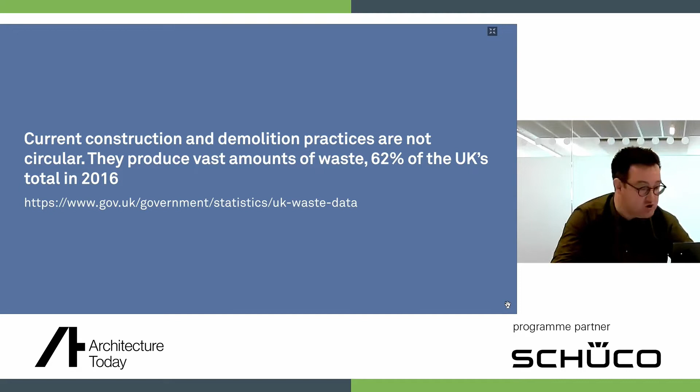We also believe that reworking buildings is critical in tackling the climate emergency. 62% of the UK's waste comes from construction and demolition, and that's something as a profession we feel that we need to change. Today I'm going to take you on a whistle-stop tour of the Standard Hotel and 160 Old Street to share why and how we made good these two buildings. They're both buildings from a similar era, both completed originally in the 1970s. And we've taken two very different approaches to these buildings, but hopefully it'll help you understand how and why we did what we did.

Firstly, the Standard Hotel. We undertook this for one of our clients, Crosstree Real Estate Partners. They won the bid to purchase the hotel from Camden. It was a very interesting purchase process where everyone else was keeping the building as an office space. It had once been the annex to Camden's own council offices, and we were the only people that thought the limitations of the building actually best reflected a hotel use, and we were able to drive value through the building and give it a new life by reimagining it as a hotel.

And we were very lucky to bring on board a series of great collaborators. The interior designer Shawn Hausman will touch on later, and they collaborated with interior architect Archer Humphryes. And obviously to have a great operator like the Standard, who had high ambitions with Crosstree to make the building an amazing exemplar for reuse.

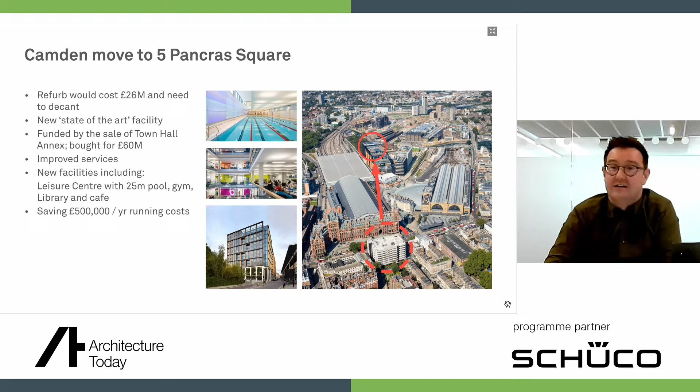This was all made possible by Camden relocating their offices to a new purpose-built facility in King's Cross. This essentially funded the build, which cost 26 million, and they sold the annex for 60 million. It saved them £500,000 a year in running costs, and gave them a new state-of-the-art facility.

The annex itself was an annex to the 1930s Neo-Palladian Camden Town Hall immediately adjacent to the building. It was completed in the late 1970s and designed by Camden Council's in-house architecture team. It bore a striking resemblance to Seifert's International Press Centre in Shoe Lane, completed earlier in the 70s, and was described by Building Design as self-effacing civic pride and order articulated by trendy 1960s quadrant cornered bays.

So it received a really positive press throughout the years, but it had fallen into a bit of disrepair over time, and it was seen as a negative contributor to the local area. It sits at a really interesting junction between the Bloomsbury Conservation Area immediately to the south of the building, and it's actually within the King's Cross Conservation Area.

So we had to do a lot of work convincing Camden prior to the purchase to keep the building - most people wanted to demolish it. We had to convince the Design South East Review panel as well. In order to do so, we engaged with the 20th Century Society to get their support, and did a lot of research into the existing building and its original design intention.

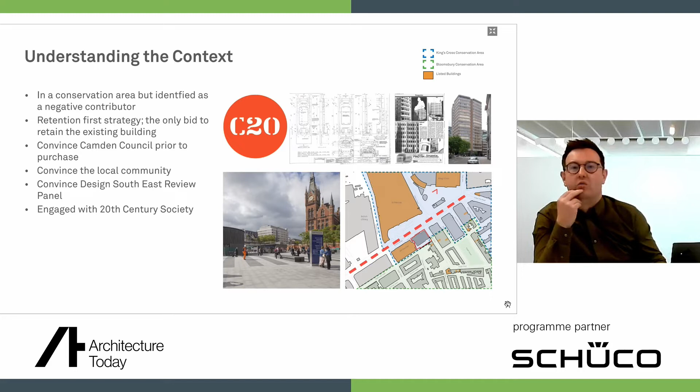This was best described by Edwin Heathcote, the Financial Times architectural critic, who described the building as a subtly compelling piece of architecture which appears more sophisticated the longer you look at it. He interestingly said it was a building as an urban backdrop, but it has the potential to become foreground. We thought that was a really interesting starting point for us: how do we meet the client's aspirations and the building's latent potential, and bring it to the foreground?

So we looked at how we would break down the existing building and start to bring it to the foreground by working with the building's existing facades, fenestration, and massing qualities to extend the building.

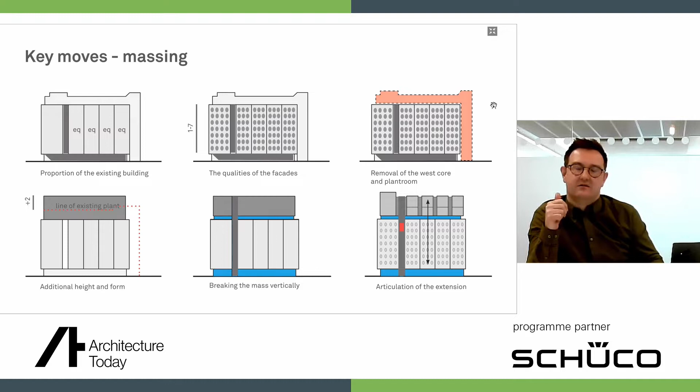There were two key moves that helped allow this extension. One was, on the right-hand picture here, the demolition of an existing wing of the building - the stair core that connected it to the Palladian building - allowing us to open up some public realm. Secondly was the addition of some new structure to the top of the building.

We carefully weaved new structure through the existing waffle slabs, leaving the existing load-bearing precast facades unaffected. We tried to do this in a really minimal, surgical way, retaining as much as possible of the existing structure and using the potential that lay within the building - meaning we actually retained 94% of all the existing building structure, which was a really key goal of the project.

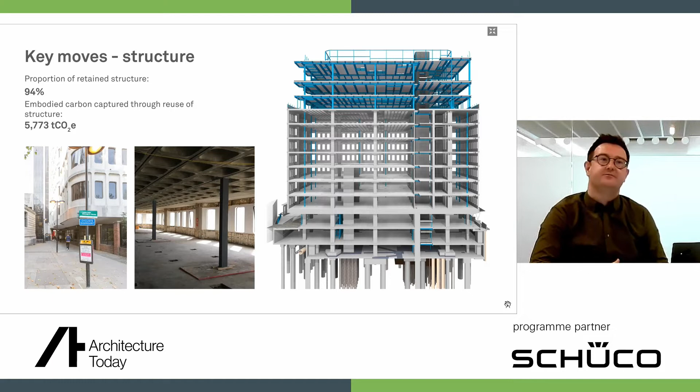The facade we cleaned up and repurposed. We worked really hard to develop bespoke windows that essentially matched the original sight lines of the original windows. We had to engage with a boat manufacturer and metal worker, Midland Alloy, who made windows for boats, and we could use their system and profile to achieve the tight radiuses and curved glass windows.

That was one of the amazing forensic challenges we had to go into here, trying to deliver authenticity back to the facade. And of course, dramatically, we carved a new vertical circulation - a new lift on the outside of the building with a red pill-shaped lift capsule.

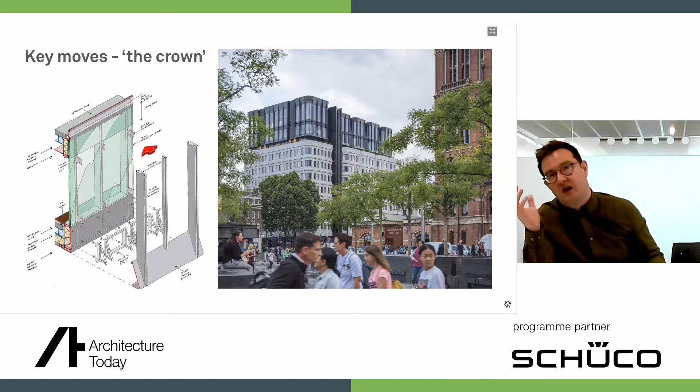On top of the building we gave it a new crown, which, as I said, was based on the massing and articulation of the existing building, working with it and complementing it. This is built very simply through a simple curtain wall and stick system, then has a series of PVD titanium-coated stainless steel fins and cladding on top, which gives it a sculptural form and depth.

We reworked the entrance to the building. You'd think you'd naturally want to open up something, but in effect we made the building slightly more solid at ground floor in certain areas. What we did do was add a striking post-tension concrete entrance canopy, which we think is very much of its time but of its place. It feels like a modern insertion that's referential to the precast concrete facade behind.

And we reinstated a pedestrian route to the south of the building, removing a kind of overgrown garden and reinstating it with a new terrace space for the hotel bar, which members of the public can walk through now, and it's opened up the back of the site of the building.

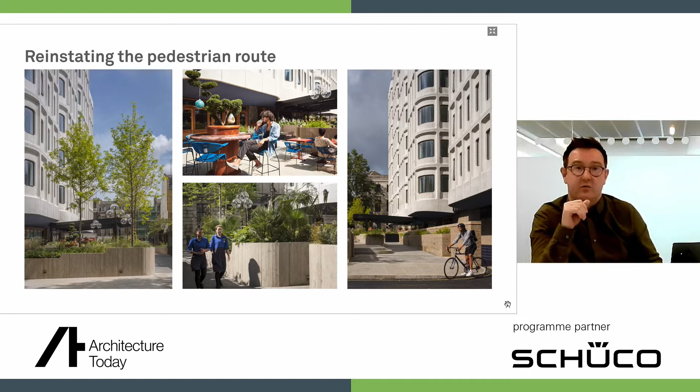One of the things we had a real aspiration for is for the building to be a destination, not just a hotel that the occupants would go to, but that Londoners as a whole would go to, and that would be used by the local community as well.

One of the things the Standard has really done here is created a programme focused around building the local community, with broad ranges of inclusive cultural events within it.

The existing town hall annex had a library at the ground floor, and that's something that's referenced within the design of the ground floor. The lounge space is actually a reimagined library, and that's where a lot of the debates and events are held.

And we have lots of big parties and after-show parties in the top floor bar as well, which are really great fun.

We worked with Shawn Hausman and Archer Humphryes on the interior designs of the project, and I think that's really reflective of the best type of collaborations you can have. The outcome is something everyone is incredibly happy with.

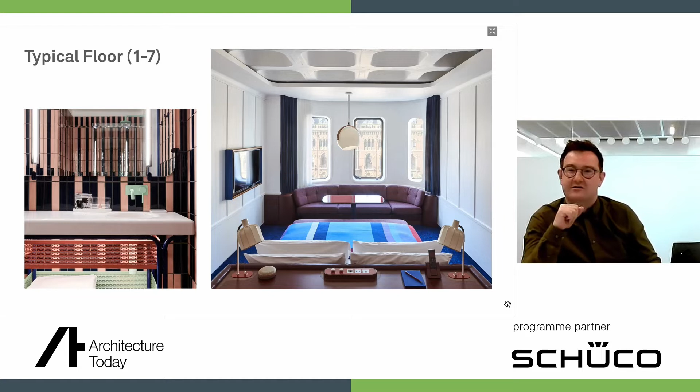The design concept behind this was to transport ourselves back to the 1970s and to digest and pixelate the transport narrative around King's Cross. So there's lots of references to underground moquettes and modern Harris tweed upholstery. In certain areas, the carpets are a terrazzo of 1970s carpets, including that of the hotel in The Shining. So there's lots of fun and spectacle within the building.

They're absolutely fantastic. As you get to the top of the building, that idea of glamour and real flair and design is taken through the bar and restaurant Decimo and Sweeties on the top floor, which has amazing views back across to St Pancras Station.

So in summary, we like to think we've helped retain a very fine piece of architecture. We've brought the building to the foreground, hopefully everyone agrees with that, and we've created an attraction and energy to the south of the Euston Road.

We've met the RIBA's 2030 whole life carbon targets, and created a place that engages with people, culture and place.

I think this was summed up by Jonathan Morrison, who said he felt we'd used a sort of magic touch that was thought to have expired with Paul Daniels, which is a very nice quote and one that we enjoyed. We thought the spirit of this quote evoked the spirit of the building, the spirit of tongue-in-cheek, and something that's not shy and retiring.

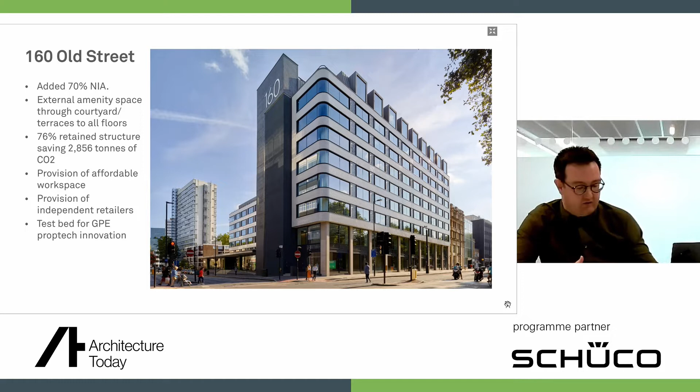This is for Great Portland Estates, and it's an interesting project for them, where they wanted to use it as a test bed for technology within the offices, but to try and really push the envelope of what a refurbished building can deliver here.

One of the challenges in the enabling works and demolition was the central wing of the building, where we discovered wood wool slabs within this area.

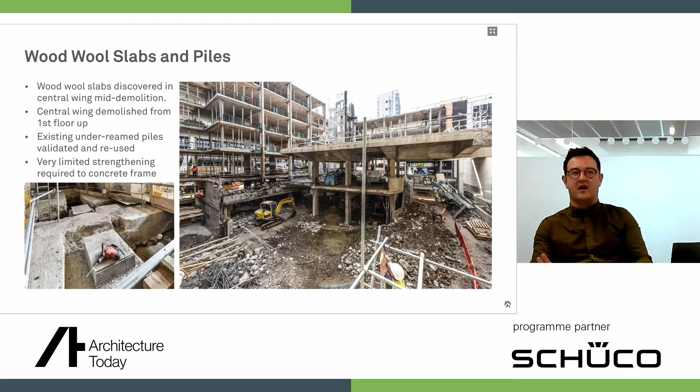Unfortunately, this meant we actually had to demolish the central wing from the first floor up, but in this discovery we were able to reuse the existing under-ream piles, and they were validated and reused at that point. So we were able to retain a lot of the existing structure here, and had very limited strengthening works.

As I said, the building was stripped back to its frame and cores, and new floors and cores were extended onto the building. One of the key moves we made was to remove a ramp to the car park entrance, infill the site with a new entrance pavilion that you can see here in the bottom left. This was really key to unlocking the potential of the building.

What we didn't want to do was remove all the cores. There were actually two lift banks within the building, when traditionally there's only one. Rather than start ripping everything out, we thought it was important to keep that, and creating this entrance pavilion ties the two lift cores together, creates a generosity and sense of arrival into the building. We felt that was a way we took a challenge and made it into an opportunity, and really helped reframe the existing building.

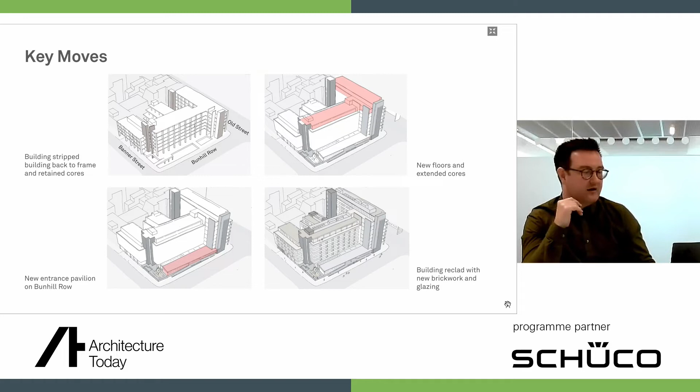Then the building was reclad with new brickwork and glazing. Again, we had to be very economical here. This was a building on a budget, and we went to a lot of depths to understand how we could maximise what is essentially quite a thin, lightweight skin of masonry on the building, and how we could use cappings and profiles and corbelling to try and give depth and quality to the building, and reimagine it away from the flat brown and glass brick building it once was.

So we added a new exoskeleton around the perimeter to carry our new facade and extend the floor plate, so we could leverage more area and value for our client. We added a new frame to the top of the building to create three additional floors.

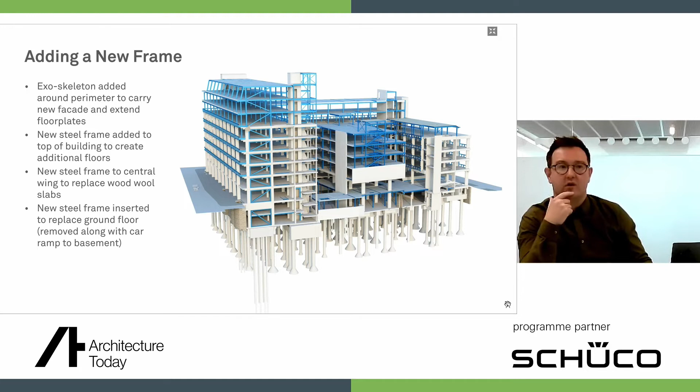And we replaced the central wing of the building. It's essentially an E shape. We replaced that central wing where we found the wood wool slabs. This is the building in plan, a typical floor here, and you can see that E shape I referred to, and the two banks of lifts within the building.

Again, it was really to just rework the cores and increase the WC provision, and remove any divisive structure. There was a large existing concrete shear wall that we took out, and that was supported by our exoskeleton around the outside. So where we were gaining area, we actually used it to make the internal space more palatable, but on the whole, the majority of the structure on floor was retained.

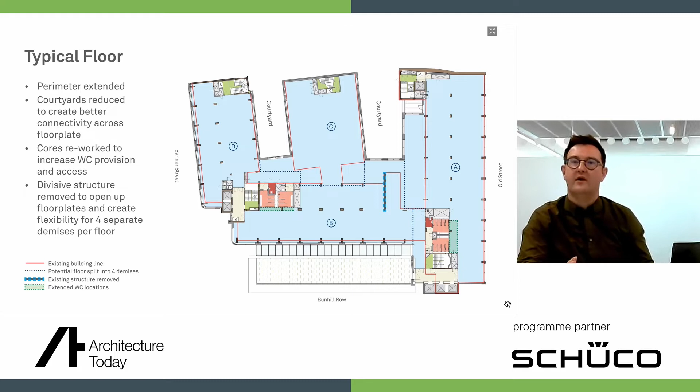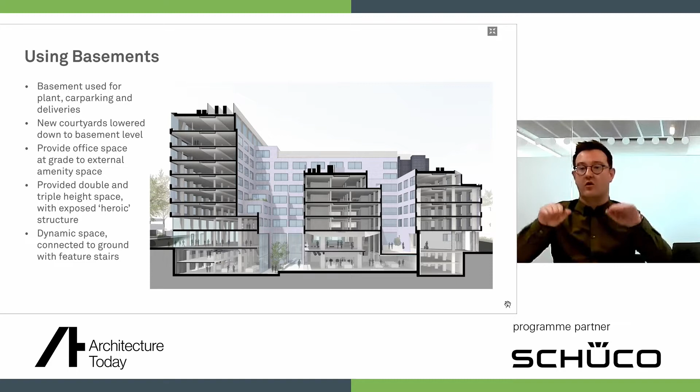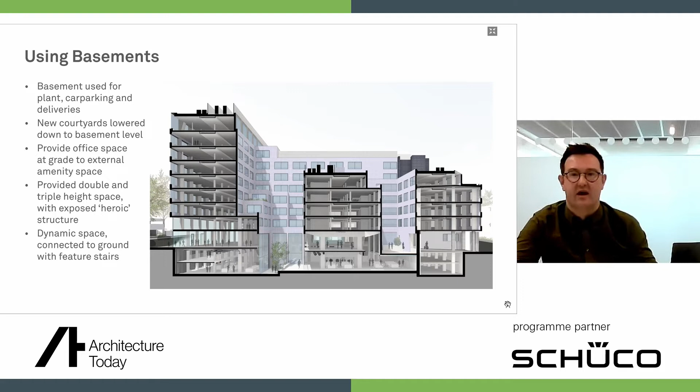One of the critical aspects was to reuse the basements. As I mentioned, there was a car park and loading bays in the basement, and we sought to open these up, and key to this was driving our courtyards down into the basement to try and create some triple height and double height heroic spaces within that basement, with feature staircases that you can see here.

So these are really open industrial style spaces here. You can see that rather than being additive at the standard, we've been quite reductive here, and we've stripped back everything and tried to take the building as far back as we can and add in as little as possible. And these are now amazing spaces. This is now the UK and European headquarters for CNN, and there's filming and recording studios in this space.

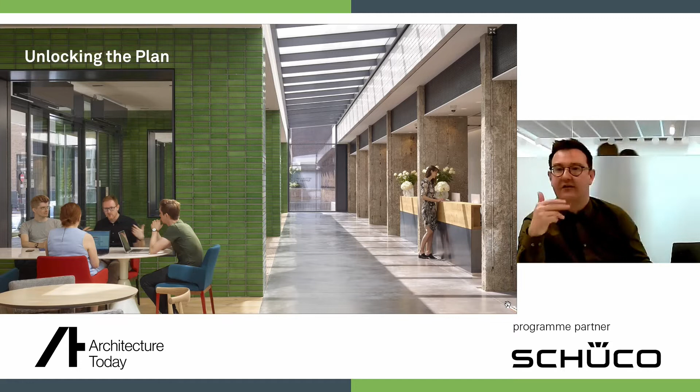I talked about the pavilion building, which I've shown you here. This is a view looking south along the pavilion. You can see we've inserted a number of glazed brick shear walls that divide off the entrance from some casual meeting spaces here and reflect the rhythm and grain of the existing structure on the right hand side.

And revealing that existing structure wherever you were in the building, whether it's the shot blasting of the original concrete piers, to exposing the basement concrete structure, and even just revealing the terrazzo and the treads in the existing stairs. That's something we thought was part of the building's DNA, and have sought to do it at every turn throughout the building.

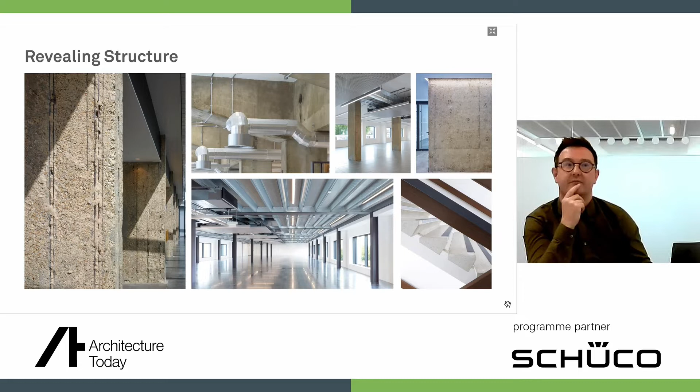At this point, I'd like to say that these buildings have formed part of our journey of working with existing buildings, something we are constantly evolving and moving through. We've set ourselves some really amazing and quite challenging targets as a practice, ones that we think are critical to our future as a profession. And we're still on that journey and evolving, moving through that journey.

One of the key steps that we've taken, hoping to take refurbishment and retrofit to the next level, is looking at material passporting. This is an open source project that we're undertaking with a number of partners, Elliott Wood, Arup, HETA and the Grosvenor Estate. And we're wanting to really jumpstart the circular economy and create a system that everyone can buy into and really help that to move forward.

We see this as the next step in our journey through retrofit, and we want everyone to be involved in this, and that's why we've created something that's open source.

So I'd like to thank you for listening to me today. Hopefully you managed to get some insight into how we went about these things and why. They're two very different outcomes from two 1970s office buildings, and buildings that we're very proud of. So I hope you enjoyed seeing them.

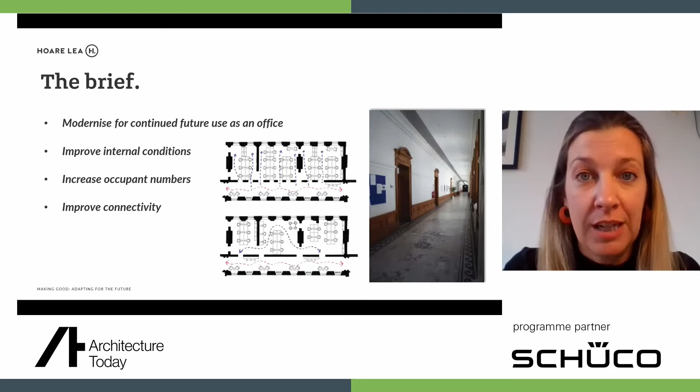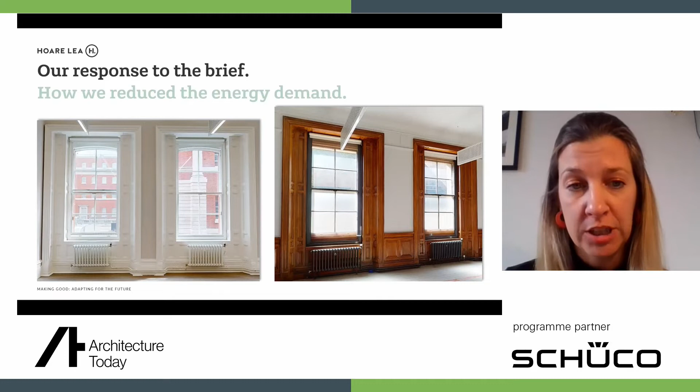Through review and consideration of the brief and potential responses to it with the design team, we ultimately opted to provide new electrical services throughout and full mechanical ventilation and cooling throughout as well. Only the existing heating system was retained with its connection to the district heating network. Before introducing any new services, we needed to bring down the load on the building. We did this by the introduction of secondary glazing. This was one of the only major interventions permissible in the historic fabric, but enabled us to bring the load down on the chillers, which was fundamental to making the project a success. We also introduced mechanical ventilation plant, which had integral heating and cooling functionality, which also further brought down that load on the chillers.

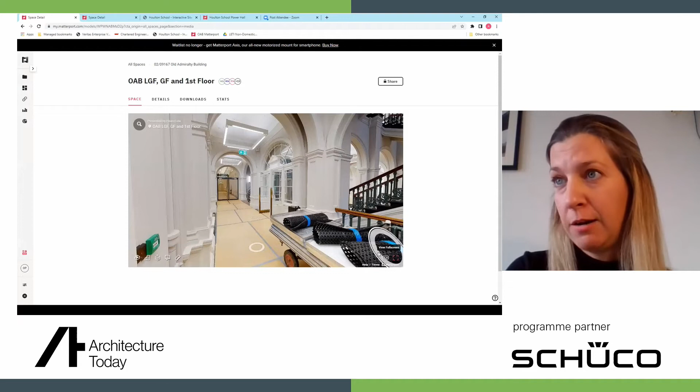Now on to the first virtual tour. So I could talk about this project for hours, but I'm going to try and condense it to a few minutes. So I'm going to focus on a couple of innovative solutions that we came up with the architecture and design team to overcome some of the particular challenges presented to us by this historic fabric. One of the first challenges was how to integrate 2 10-ton air-cooled chillers somewhere in this building. Now, as you can imagine, roof space was at a particular premium, so the only real option was somewhere in this courtyard. But in reality, we had to keep out of this courtyard as far as we could because the Queen's carriage turns around here on the parade days.

So it was decided that we put the chillers in this light well over on the right-hand side here, which, as you can see from this angle, is quite unobtrusive. But when you get up close and personal at this balustrade here, at the edge of the courtyard, you can, of course, see them, but we looked to mitigate the impact still by sinking them down. So there's 5 stories from the top of the roof there down to the bottom, which is great from a visual impact perspective on the rest of the courtyard, but not great from a services perspective because of the risk of recirculation of the air, with the warm air off the top being drawn back down into the intakes, which incurs a risk of derating the performance of these pieces of equipment.

So to overcome this, we engaged in an iterative design process with the architect and the rest of the design team to come up with this bespoke architectural lid solution. So this is solid from the back wall here to about 2/3 of the way up the length of the chillers. And then we have the ductwork sections off the top, which helps to direct and push the air further up out of the way, thus mitigating the risk of recirculation.

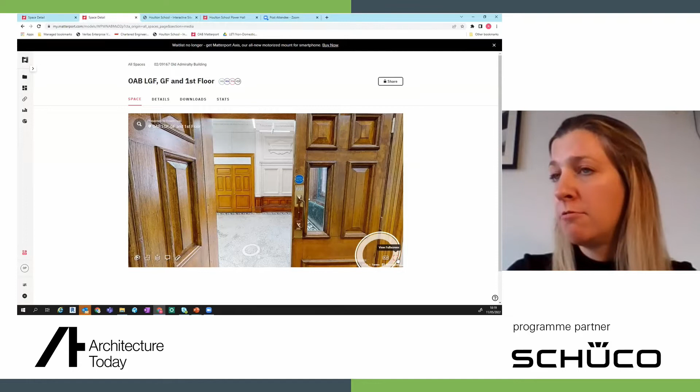So as we move into the building, I really wanted to show you all these corridors. They are some of the most historically significant features of the building.

As you can see from these amazing mosaic floors, the ornate arches, it was paramount that we kept our services out of them as far as we possibly could. So these are where the messengers used to run up and down between the offices of the naval officers of the Admiralty before the invention of fax and email.

So in keeping with getting our services out of these corridors, we had to limit the crossovers from the cores to the offices to certain locations, and we took to tuck them up into the arches as far as we could. Now, this was a challenge from a coordination perspective, given the different levels, the different structural conditions all over the place, and the different size of the services. But we worked really hard with the design team, spending days on site, looking at every different individual solution, and we're pleased with the result.

So as we move into the offices, you have this floating raft solution above us. I call it a floating raft because it started life as a bulkhead pushed to the back wall and up to the soffit. So the architect went through a lot of negotiations with the conservation officers, working hard to pull them away from the soffit and the wall to reveal these cornices, and hence it became the floating raft.

We then introduced a bespoke solution to the fan coil unit enclosures, where we undertook manufacturer testing with the ceiling, grill and fan coil unit suppliers to come up with a solution that pushed the fan coil units as far back to the raft as we possibly could, thus minimising the visual impact in the space and how far they extended. So back onto the presentation and onto the next case study.

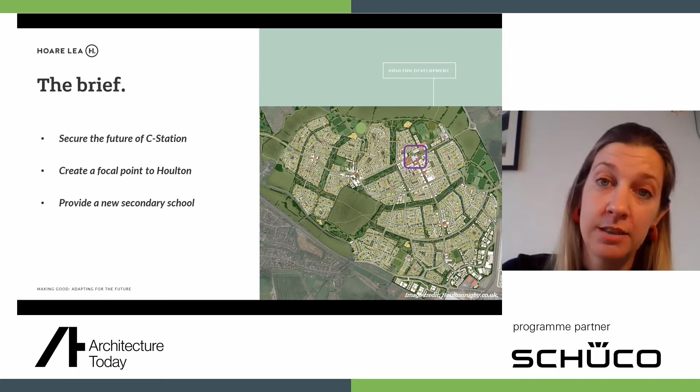We worked with a multidisciplinary team to deliver the project for Urban and Civic at the heart of their new Houlton development. As C-Station was falling rapidly into disrepair, it was important to preserve its presence and cultural significance as the heart of the new Houlton development of just over 6,000 homes and a new civic centre. Converting C-Station into a new secondary school as part of this new community was an opportune means to realise this vision and brief. A key part of the success of this reinvention was the ability of the architect to align the new use to the form of the existing spaces.

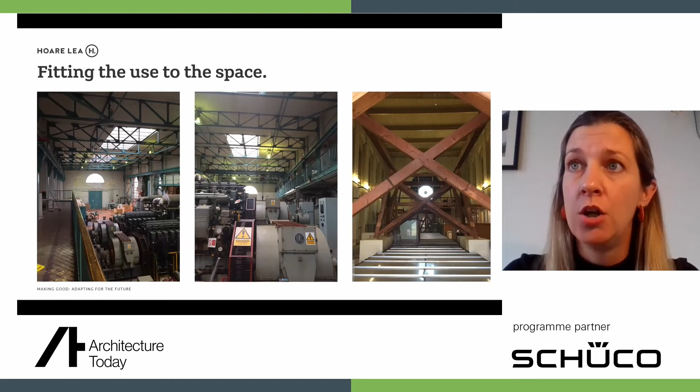I wanted to show you the power hall because I think it's a good demonstration of how we coordinated the plant areas with the architect and the existing architecture to best respond to the historic features of the spaces. So as you can see, we've coordinated all of the services with these existing steel beams, which we wanted to celebrate, of course. And we also looked to avoid, where possible, interrupting the secondary glazed windows and the roof lights at high level.

So what we did was we double stacked our plant room right at the end of the dining hall here, and this helped to minimise the footprint of the plant room whilst utilising the full height of the space, making the most of that height. We also looked to do that to try and mitigate taking up too many of the windows and reveal as many as we could, but unfortunately a couple did fall into the demise of the plant room.

But we looked to best use these by integrating intake and exhaust louvers into these existing openings. So on the face of it, you might say that's an issue because we have impacted the windows, but in reality there was a key driver as well to not create additional holes in the fabric if we could avoid it.

So I've talked to you a little bit about the services integration within each of these buildings, but what does this mean for carbon? I'm now going to attempt to answer my own question by running through the as-built performance of each of these case studies and where I think we collectively need to take the industry next.

Noting the general position of the industry at the time, there were no whole-life carbon targets set for Old Admiralty. In fact, the carbon calcs we were held to were Part L EPC only, not the operational carbon targets, carbon calculations that we undertake today, which include all of the operational carbon, not just the regulated energy.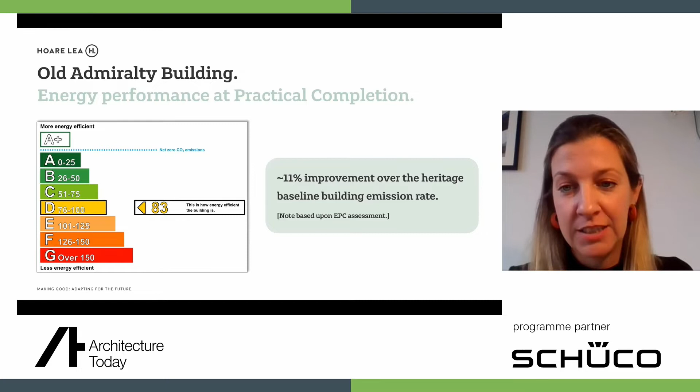Nonetheless, the improvements we made led to an estimated as-built 11% improvement over the heritage baseline building emission rate. We would have also achieved an as-built EPC of C rather than D had the district heating network carbon factors not worsened over the course of the project.

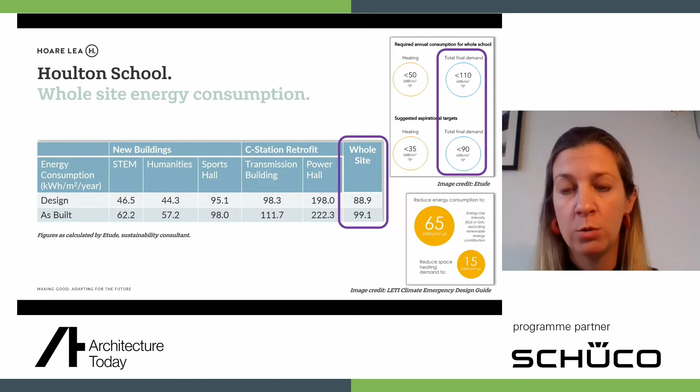A few years later, when we were designing Houlton School, the world and its ambitions in terms of carbon had evolved. Required and aspirational energy consumption targets were set for the whole site, as it was imperative that energy consumption and therefore operational costs of the school were at a manageable level. As you can see from these images, the estimated as-built energy consumption for the whole site met the required target and were just shy of the aspirational.

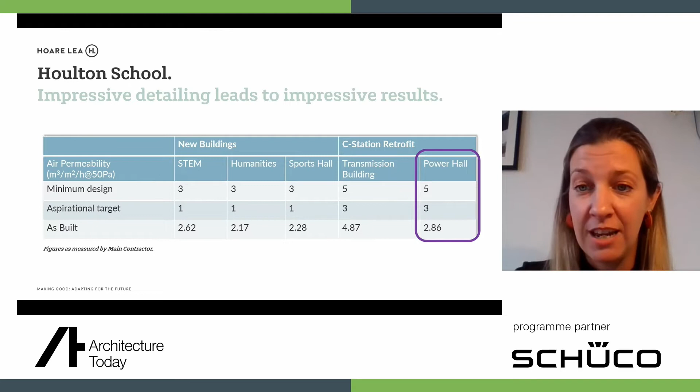The picture now in our industry has evolved further still. We understand that the UK government will soon be ramping up pressure on the non-domestic sector by introducing a performance rating system for all existing buildings, thus encouraging appropriate retrofit to reduce energy use. This is a snippet from the UK Green Building Council's Whole Life Carbon Roadmap, which indicates how this might be introduced over the next decade, starting with offices and then moving through the other sectors.

In addition to this, there are proposed targets coming in the form of guidance which is under development by LETI and CIBSE as part 3 of their retrofit guide.

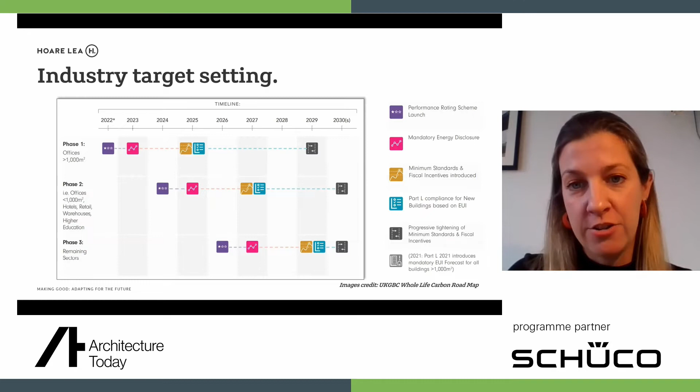We of course always want interventions to be mindful of the preservation of the architectural and historical significance of these buildings, but will that balance shift between the intervention and the performance as wider cultural priorities change? Whether this balance shifts or not, it's still worth noting that there are absolutely things we can do to reduce the energy consumption in these existing buildings. And with the now widely recognised inherent benefits of retaining and retrofitting rather than demolishing and rebuilding, we will likely and hope to see a greater appetite for these types of projects going forward.

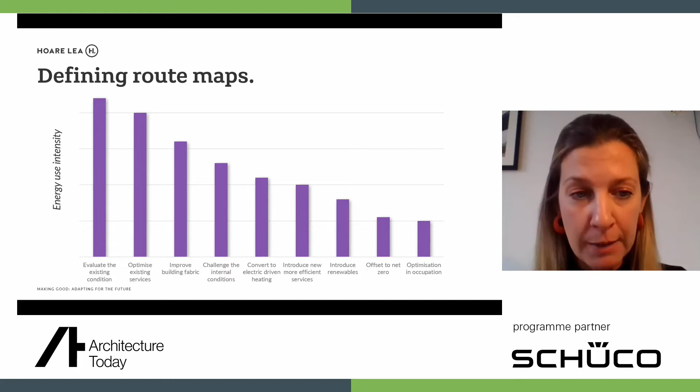Route maps such as this one can be used as a step-by-step guide to driving down energy consumption and carbon emissions. The first few steps are the application of passive measures, like the ones we've already talked about, such as improving the building fabric to reduce the energy demand before we introduce any new services at all. Once the building energy demand is reduced, we then need to look to ways to move away from fossil fuel and into electric-driven heat sources.

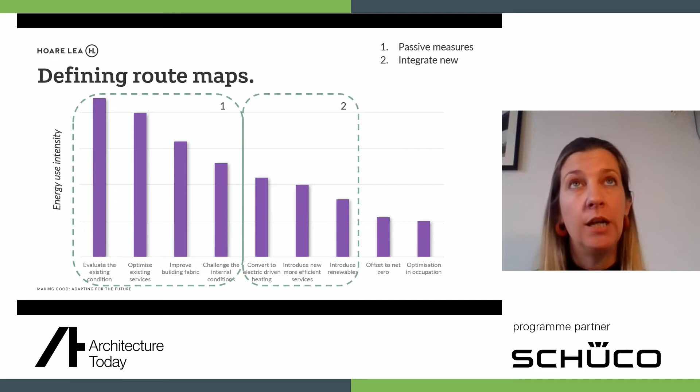Now, this poses a particular challenge in buildings like this because the heat pumps that are often used for this require either connection to atmosphere, land, or water. By land, I mean buried. So you can't just bury a load of boilers somewhere in a basement with a couple of flues sticking out the building. So innovations such as the chiller one at Old Admiralty are going to be key to moving this type of technology forward in these buildings. A full understanding of and appreciation for the history of the building is also fundamental to sensitively integrating any new services that are required.

And finally, to evaluation, offset and optimisation. Post-occupancy evaluation and optimisation will be key to the successful reduction of energy consumption and carbon emissions. If the systems that we're introducing aren't functioning as required, then all of the efforts to retrofit them into a building are futile. Furthermore, we all need to be gathering, sharing and learning from these retrofit projects in order to collectively improve and drive the industry forward at the pace required.

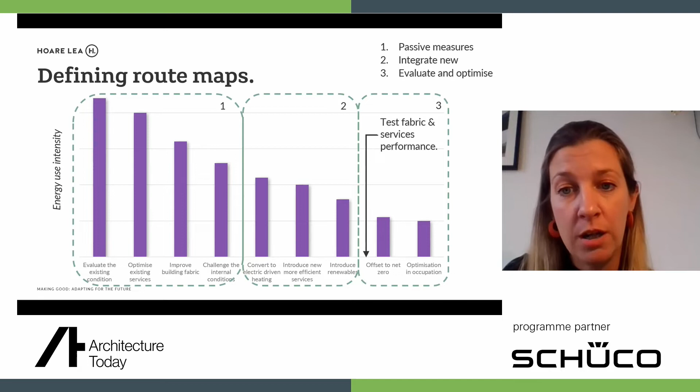As the case studies I've talked about have shown, a difference can be made in the performance of these buildings. And whilst deferring to exemptions from building regs and the like may of course still be required in the retrofit of historic buildings, we shouldn't feel afraid to look for ways to challenge and innovate in order to propel the retrofit of historic buildings forward to positively contribute to the carbon agenda.

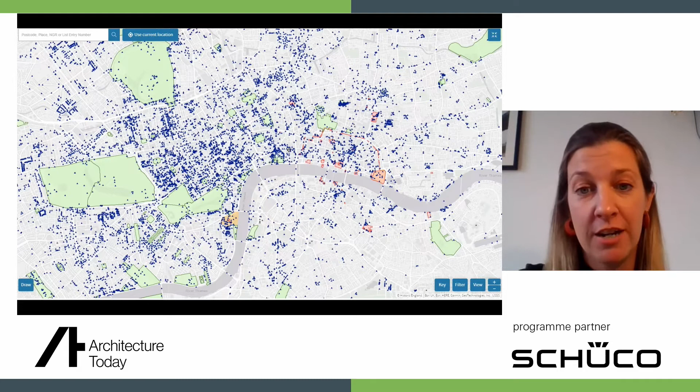And thank you for giving us such an inspiring presentation. You talked near the end about this question of whether more intervention should be allowed in historic buildings if we're to improve performance. And I wonder what else you would have liked to do in the two buildings that you showed if you'd been allowed to.

That is an interesting question. I think for Old Admiralty, this would be quite extreme, but there are often talked about benefits of doing mixed mode ventilation rather than just full mechanical ventilation to bring your loads down in the mid-seasons. And a way I wondered to do this would be to integrate and mimic the cavity ventilation in the walls, the air bricks, mimic that appearance and introduce more openings, punch through to the spaces and use those to bring air through in the mid-seasons for mixed mode ventilation.

The quantum of the vents required would be quite high, but it would be interesting to understand in the future if that kind of thing would be accepted if we demonstrated a big enough carbon saving.

I think on Halton, the power hall had an enormous flat roof, which would be great to put PVs on. I think that was discussed early in the design stages and viewed too impactful, particularly with the views from the transmission hall down. But again, going forward, if we're going to drive these energy performance figures down and down, maybe that's the balance that would be struck. It's an industrial building, so having industrial type appearance things on the roof is kind of in keeping, and it's just moving it forward and ensuring it can be used for generations.

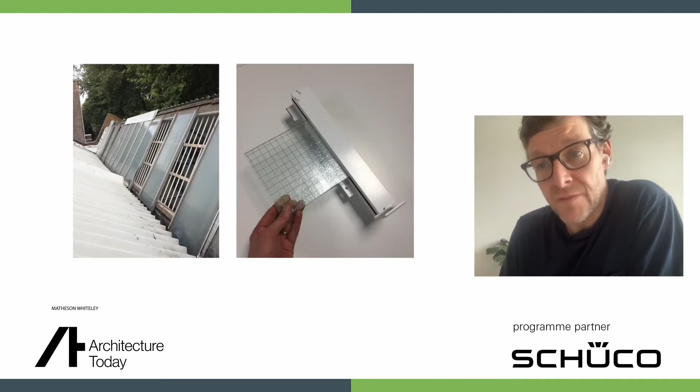The same project required new insulated glazing to a set of roof lights. In the process of doing that, we looked at using traditional wired glass as part of the double glazed unit. Other than the huge benefit to the thermal performance of the building, the wired glass provides this diffuse natural light quality, which means that the exhibition spaces have this really appropriate condition for the display of paintings in particular.

Another project is a mixed-use development we completed recently in Forest Gate in East London, which is a building that had a very solid basis to it, and again there were some aspects of repair required there, along with the addition of a lightweight extension to form additional volume. There we found the act of repair to the existing building combined with a material that would sit on a much lighter weight extension on the roof. We found this insulated render system, which is used directly onto the brickwork of the existing base building. Again, it's an interesting result in that it has this singular, fresh architectural identity, which at the same time is giving the building some longevity.

Another brief example is a slightly more disruptive approach to repair. This is a site where we were working with a series of buildings, some of which had this character, storage buildings, useful storage buildings or workshop buildings. The project here was actually to remove them rather than reuse them, and in their place form a very efficient version of those buildings, a new industrial building. The strategic move here is to provide a really functional building that our client could establish their business on, while over a much longer period of time focus on the restoration of this arts and crafts building by Edward S. Prior, which has been converted into a family home.

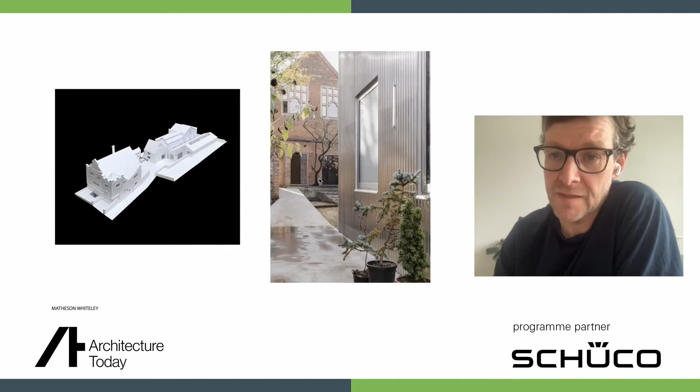So yeah, a much more broad interpretation of the act of repair on a site-wide scale. But again, it's something that's delivered a fresh architectural identity through that, combined with that act. So our project for Studio Voltaire is located in South London. This is an aerial view, just to give you a location, and this is Clapham High Street with the edge of Clapham Common here.

So it's in quite a varied existing context of residential buildings and larger industrial buildings. As you would walk past it prior to the refurbishment, you might notice this chapel, which was an exhibition building, and actually it was potentially the only part of the organisation, or the only place where the organisation could engage with the public.

Studio Voltaire are a not-for-profit organisation that support and provide artist studios and have a programme of exhibitions to support that and give some engagement with the local community as well as the wider artistic community. They had developed a very strong reputation for supporting artists at the very earliest point in their careers, some of which have gone on to do incredibly well and be involved in Turner Prize winners and that sort of thing, which is wonderful.

They've been working on this site for around 25 years and had got to a point where they had enough support and resources to think about a major capital project to significantly upgrade the existing buildings. In a way, there was no question about any replacement of those buildings. I think they had found that the character of these buildings was very much part of their identity as an organisation, particularly the chapel.

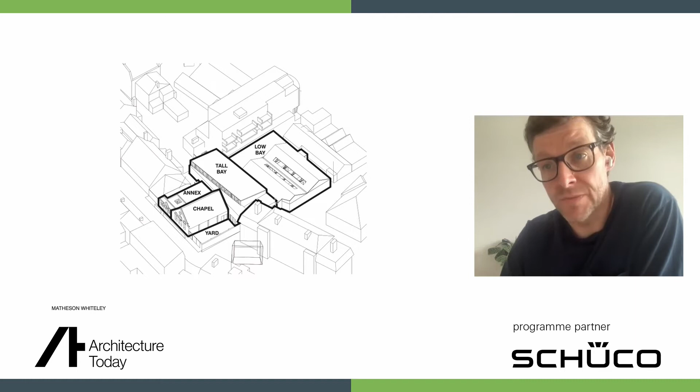And the industrial buildings behind, we categorised them tall bay and low bay. They're workshop buildings or industrial buildings that have been reappropriated, and these are some examples or some images from the site as we started to work with it. Just an accumulation of fairly unplanned and ad hoc studio separation.

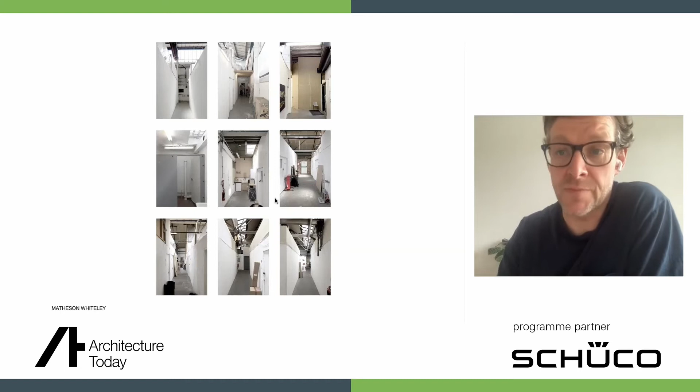All in the context of quite problematic building fabric issues, principally with the roof of the building. As you saw from the diagram, those roofs are quite extensive, and there's issues with asbestos, issues with lack of insulation, issues with water management.

They leaked quite extensively. So whereas the organisation had established a presence on the site and a programme and a really vital place to provide affordable space for artists, the thing they were having to wrestle with was the conditions in which those artists had to work. I think there were a few basic issues over warmth and having some sort of security, and things like that were the priorities around the capital project that we became involved in through a limited competition.

The competition was organised by the Architecture Foundation, and it was a really rare invitation for quite new practices to have a chance to compete through a design competition for a public building, which, just in terms of the procurement process that young practices have to engage with in the UK, is increasingly rare, and we're very grateful for the opportunity.

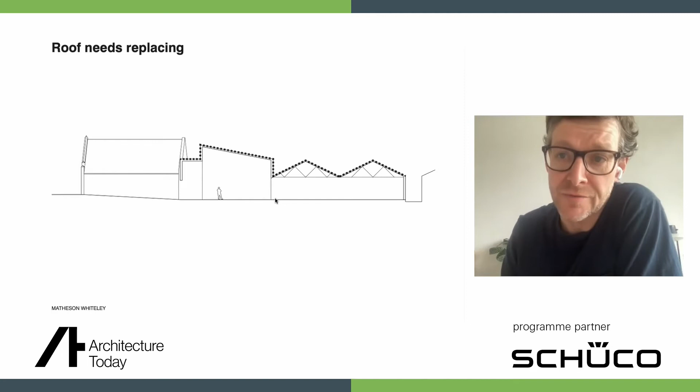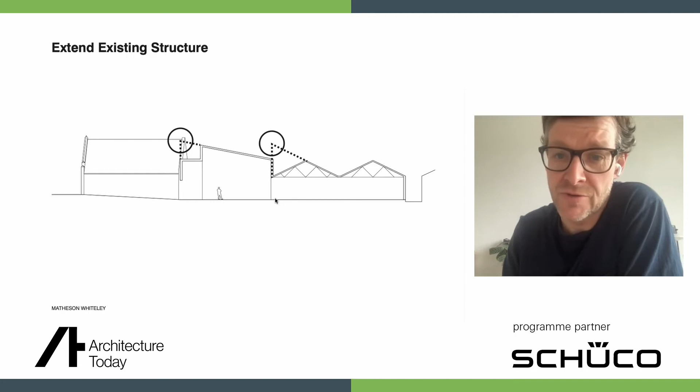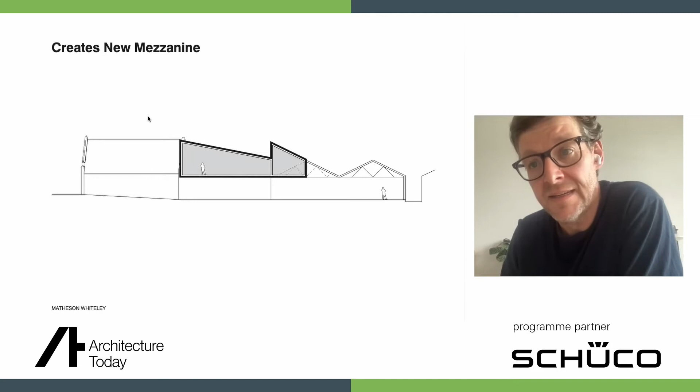And one thing we noticed is that in the process of replacing that roof, it was possible to make some relatively modest adjustments, not replacing existing structure, but actually working in the logic of the existing structure, and in doing so we could generate enough volume to create a quite significant additional floor area on a mezzanine level, which capitalises on the long clear spans that the existing industrial structure was offering.

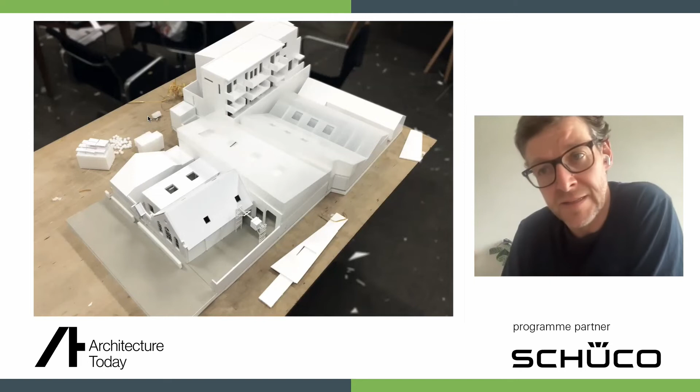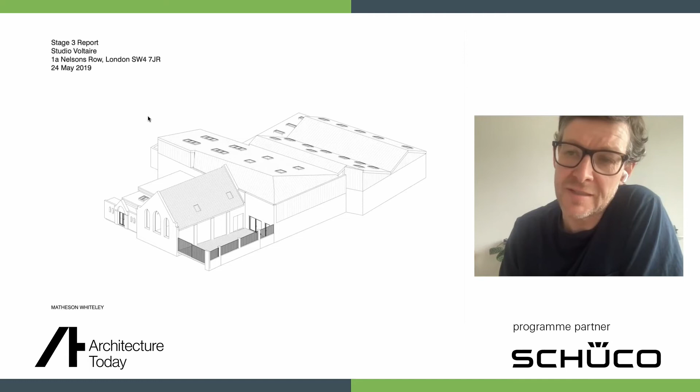And in terms of the iterative process that we engaged in, together with the client and the engineers and other people involved in the project, this is an early model, but the character of this roof did develop, I think, from something that reads as a real separate object, something that had a more playful architectural character, into something that started to actually resemble very much the shapes and profiles of the existing roofs.

I think that was very much because of the desire to really minimise the costs related to adaptation of the structure, and it was really working with the existing logic of that structure that led us to this.

I think we started to feel there was quite a nice result from this, that the changes at the roof level really diminished in terms of visual impact, and they were quite subtle. I think it felt completely appropriate that the significant visual image of the project remains the chapel, and it's now complemented by an artwork which is a refurbishment of a new public garden by the artist Anthea Hamilton, a conversion of this existing yard. I'll talk a little more about the significance of that yard and its new role as the main entrance to the site.

I mentioned the visibility of the whole site. This was just a very basic diagrammatic expression of what a visitor would experience. They had the opportunity to visit the gallery, and there were problems with that because there were level changes, so it wasn't fully accessible. There was the yard that was sort of forgotten, and there were the studios, which were, to all intents and purposes, pretty invisible, although every now and then you might get a sense of the activity if you walked through some of those labyrinthine corridors.

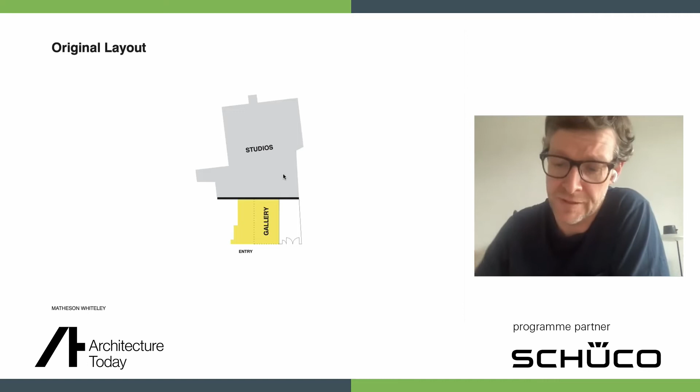Our approach was actually to utilise the yard and the natural level change that it offered to bring visitors in deeper into the site, at the level of the floor of the gallery, making the whole site, for the first time, completely accessible to all.

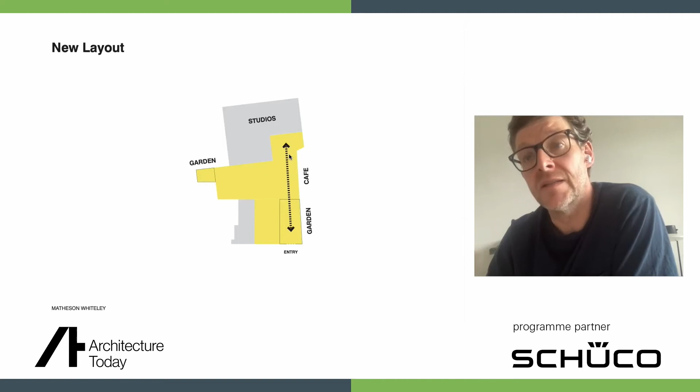The addition of the mezzanine that I showed in the section had fairly significant impact, in that we hit the provision of studio target in a way that meant other parts of the ground floor could be dedicated to other supporting uses, ranging from a new retail shop, a cafe, education space, which sits in this part of the site in conjunction with a new garden. That garden itself is an opportunity that came about from looking at demolishing some of the existing built volume for something that was pretty vital, some external space, and also a series of social spaces that can be used in different ways, semi-public, for studio users to come together.

Just very quickly, this is the plan. I think the only real thing to say is that this is the yard, this is a new cafe space, and off that is the vertical circulation, which is a lift and stair. This is the block of accommodation formed in the structural adjustment, and this is the set of studios on the mezzanine.

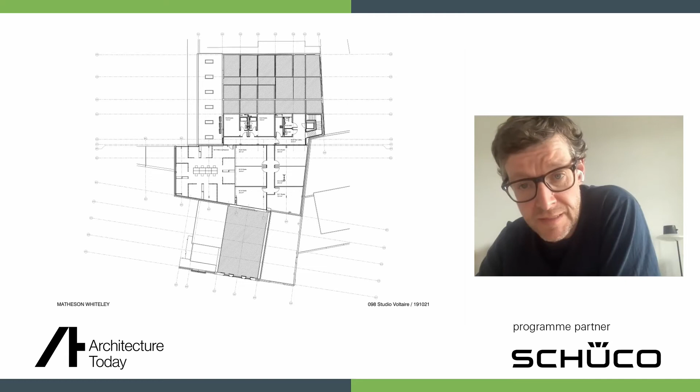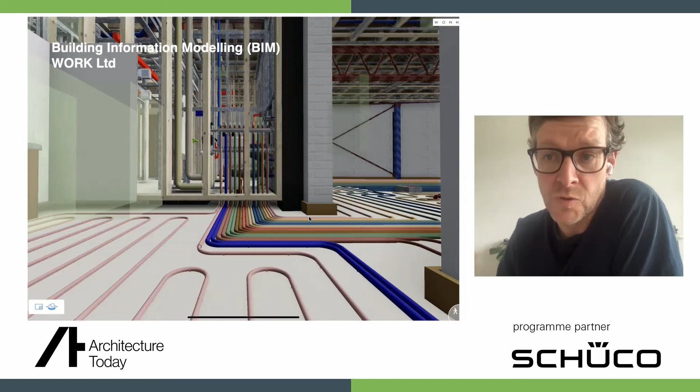We had the opportunity, because of the support we got from the client, to do an early strip out, which gave us the opportunity to document the existing condition quite precisely. The project was delivered in BIM, so a digital twin BIM model was developed by the whole design team working together, and the contractors worked directly off that model to build, rather than sets of paper drawings. They worked off devices to access the single model environment, and that allowed quite a focus on prefabrication, so all the internal partitions, as well as being alleviated of some practical requirements through a lot of work on fire strategy.

The components are quite lean, so a lot of prefabrication in terms of the METSEC frames to the partitions, but the leanness in terms of quantity of panels, etc., means that the quality of those panels can be lifted, and rather than being plasterboard, they're painted OSB panels, which give a sort of robustness and also a nice level of interchangeability. And in terms of the position and the setting out of those walls, it was quite deliberate to kind of reveal the sort of accidentally elegant backdrop of this wonderful industrial structure

that was retained. And I think we organised the layout to offer quite long views, all of which sort of arrive at places of gathering or opportunities for gathering. So this is one space that is offered as a sort of artist's kitchen or social area, and it can also be used and has been used and is being used as sort of intermittent exhibition space by some of the groups who are working.